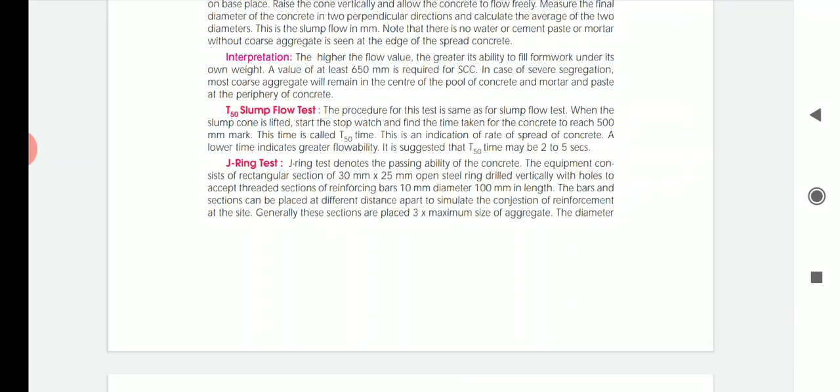So in the fifth module we were studying about self-compacting concrete. In that we studied the definition of self-compacting concrete, and also the materials which are included in self-compacting concrete. And now we were studying the tests which are included to test the workability of self-compacting concrete.

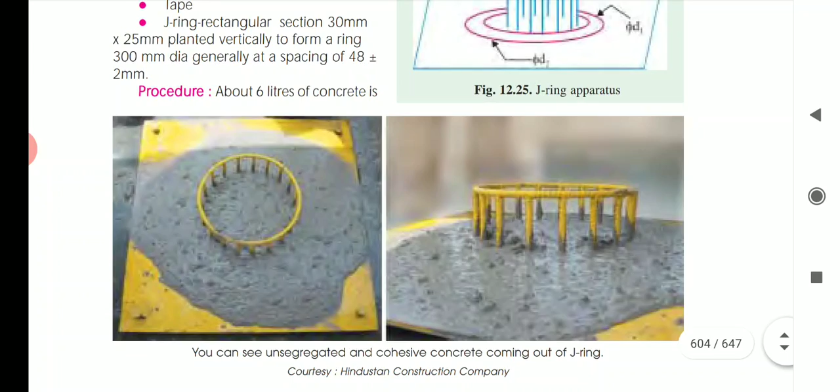In that we studied the slump flow test. After the slump flow test we have one more test, called the J-ring test. You can see the apparatus used for this J-ring test. This J-ring test denotes the passing ability of a concrete. The passing ability is checked with the help of this J-ring test.

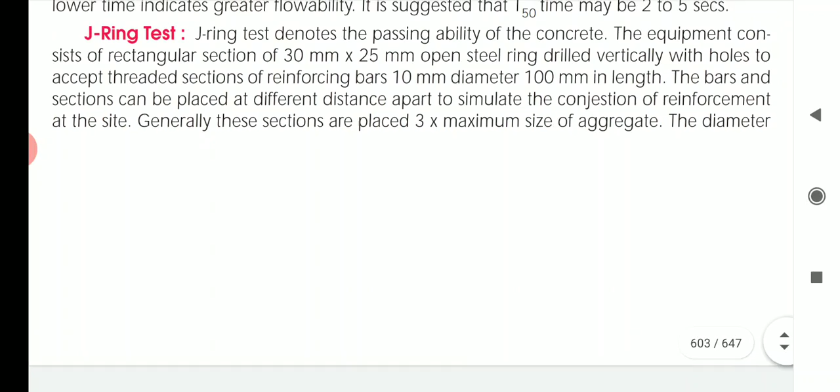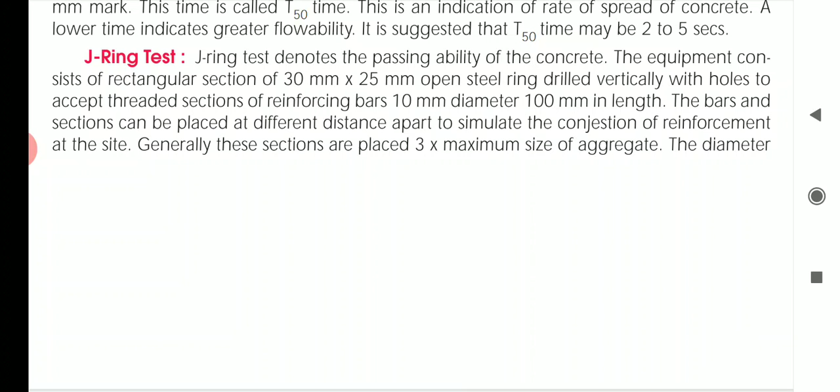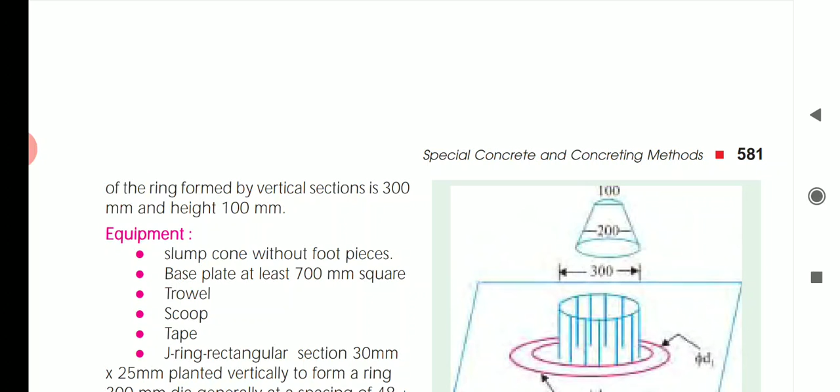The equipment consists of a rectangular section of 30 mm into 25 mm open steel ring, drilled vertically with holes to accept the threaded sections of reinforcing bars of 10 mm diameter and 100 mm length. The bars can be placed at different distances apart to simulate the congested reinforcement at the site. Generally, these sections are placed 3 times the maximum size of aggregate. The diameter of the ring formed by the vertical sections is 300 mm and the height is 100 mm.

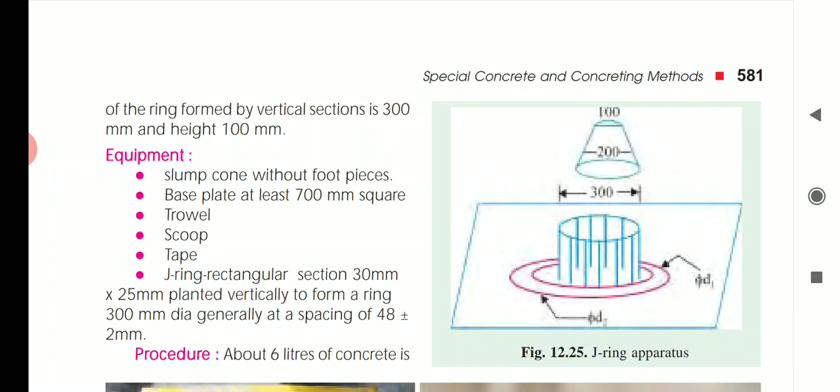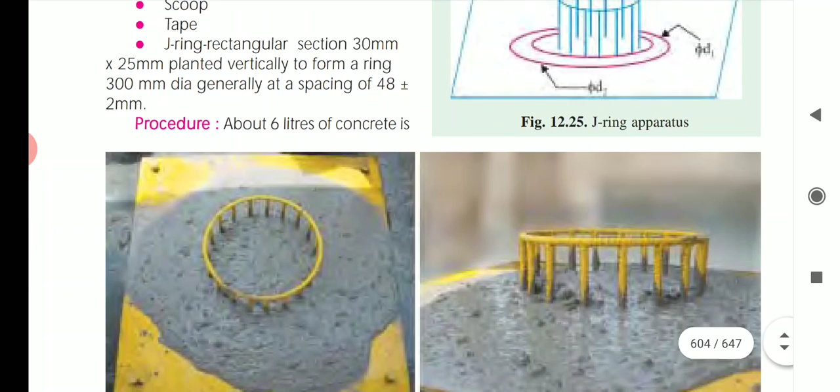The equipment used is a slump cone without foot pieces, base plate at least 700 mm square, trowel, scoop, tape, and J-ring, a rectangular section of 30 mm into 25 mm planted vertically to form a ring about 300 mm diameter, generally at a spacing of 48 mm plus or minus 2 mm. So this is the plate, and the J-ring is shown in the picture.

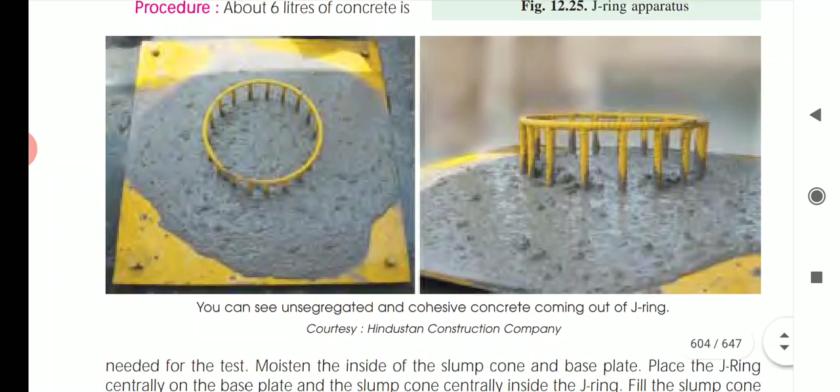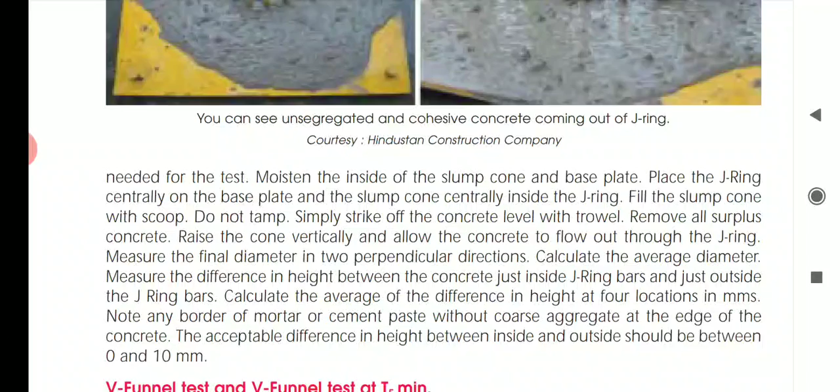So what is the procedure for this? About 6 liters of concrete is needed for the test. Moisten the inside of the slump cone and the base plate. Place the J-ring centrally on the base plate and the slump cone centrally inside the J-ring. Fill the slump cone with a scoop. Do not tamp. Simply strike off the concrete level with a trowel. Remove all surplus concrete. Raise the cone vertically and allow the concrete to flow out through the ring.

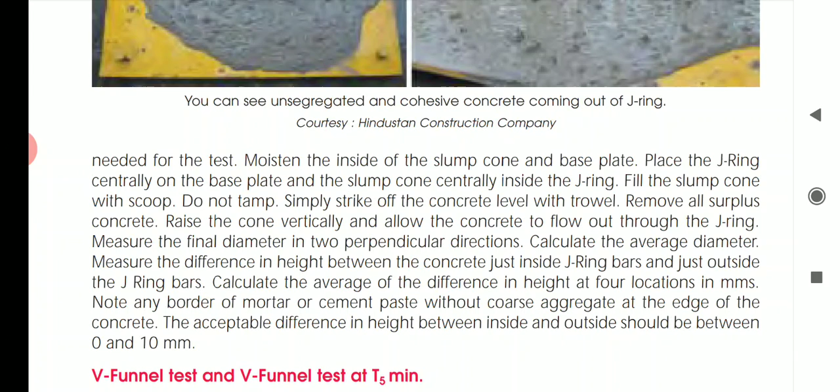So first place the plate. Place this horizontal plate, above that place the ring, inside that ring place the cone, and in that cone you need to add the concrete. Do not tamp this cone. Simply strike off the concrete level with a trowel. Remove all the surplus concrete from the surface. Raise the cone vertically and allow the concrete to flow out through the J-ring.

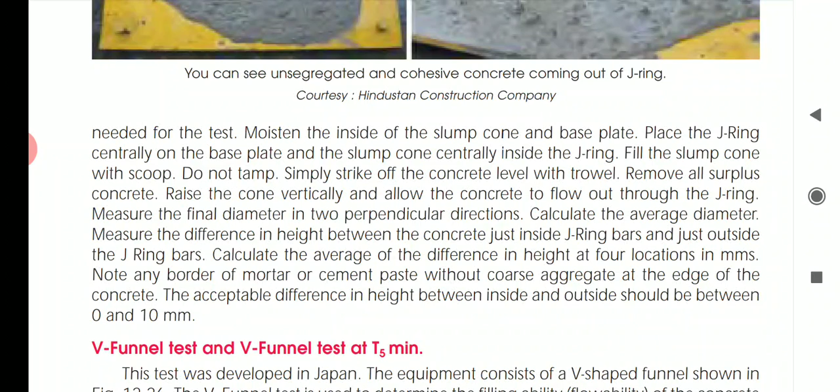Measure the final diameter in two perpendicular directions. Calculate the average diameter. So when you lift the cone, the concrete starts flowing inside this J-ring. So how much distance will it travel? Measure the diameter of that spread.

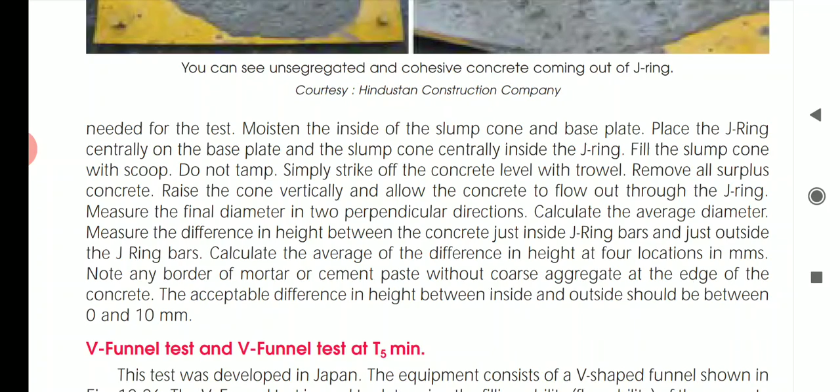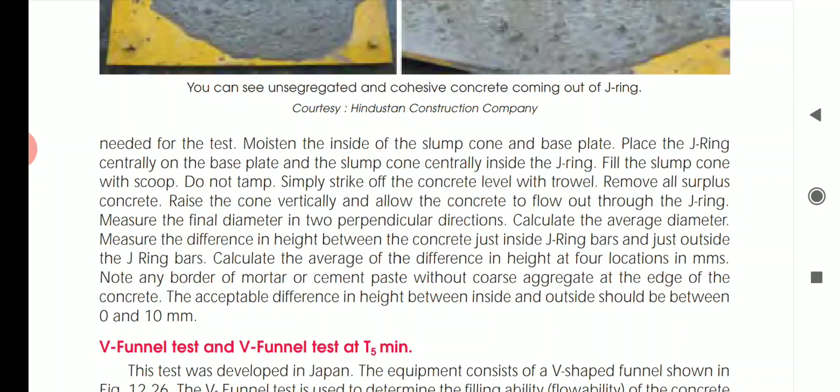Calculate the average diameter. Measure the difference in height between concrete just inside the J-ring bars and just outside the J-ring bars. Calculate the average difference in height at 4 locations in mm. So inside and outside, what is the difference, that you need to calculate. Note any border of mortar or cement paste without coarse aggregate at the edge of the concrete.

The acceptable difference in height between inside and outside should be between 0 to 10 mm. Then you can say the test is correct and the concrete is workable. So the difference between the height of concrete inside the ring and outside the ring is about 10 mm.

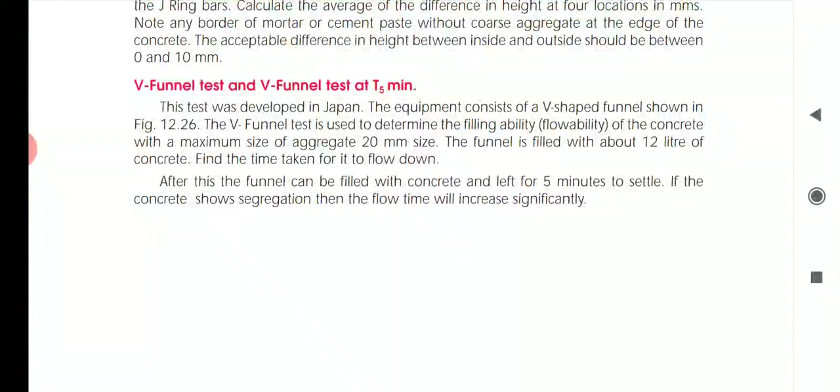V-funnel test and V-funnel test at T5 minutes. The V-funnel is the third test for self-compacting concrete. The test was developed in Japan. The equipment consists of a V-shaped funnel shown in the figure. The funnel test is used to determine the filling ability of concrete with a maximum aggregate size of 20 mm. The funnel is filled with 12 liters of concrete. Find the time taken to flow down.

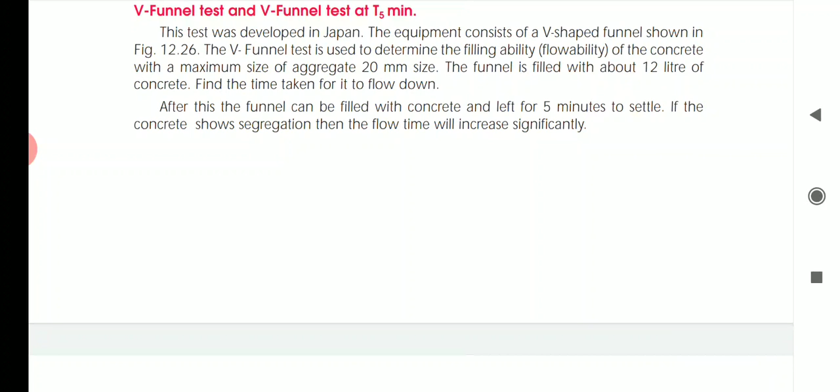After this, the funnel can be filled with concrete and left for 5 minutes to settle. If the concrete shows segregation, then the flow time will increase significantly. So they have shown a funnel here. This is the equipment structure. The equipment used is the V funnel, a 12 liter bucket, trowel, scoop, and stopwatch.

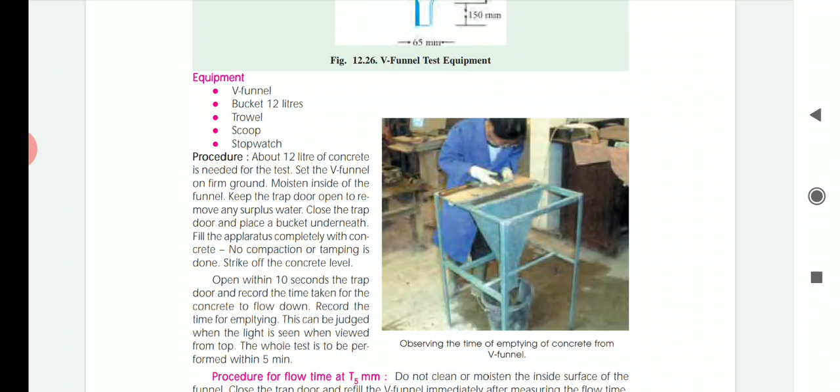First you should lubricate this V funnel, means you should put oil on this V funnel. About 12 liters of concrete is needed for the test. Set the V funnel on firm ground. Moisten inside the funnel. Keep the trap door open to remove the surplus water. Close the trap door and place the bucket underneath. Fill the apparatus completely with the concrete.

Close the door and fill the concrete. No compaction or tamping is done. Strike off the concrete level. Open the trap door within 10 seconds and record the time taken for the concrete to flow down. Record the time for emptying also. This can be judged when light is seen when viewed from the top. The whole test is to be performed within 5 minutes.

Now the procedure for flow time at T5 minutes. Do not clean or moisten the inside surface of the funnel. Close the trap door and refill the V funnel immediately after measuring the flow time. Place the bucket underneath. Fill the apparatus completely with the concrete without tamping or tapping. Strike off the concrete level with the top by trowel.

Open the trap door 5 minutes after the second fill of the funnel and allow the concrete to flow. Calculate the time taken for complete discharge. It is called the flow time T5 minutes. For the V funnel test, the flow time should be between 8 to 12 seconds, and for flow time T5 minutes, plus 3 seconds is allowed.